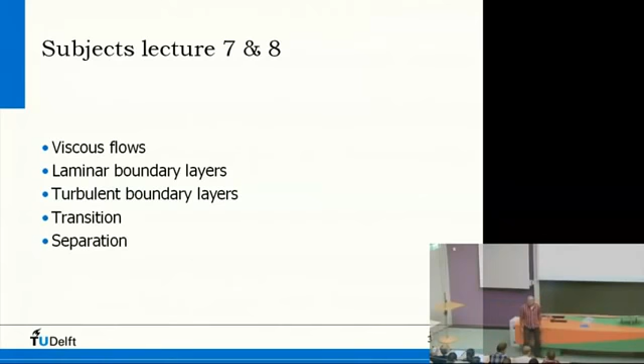So it's about viscous flows, laminar and turbulent boundary layers. You have read all about that, maybe heard all about that from Professor Bijl.

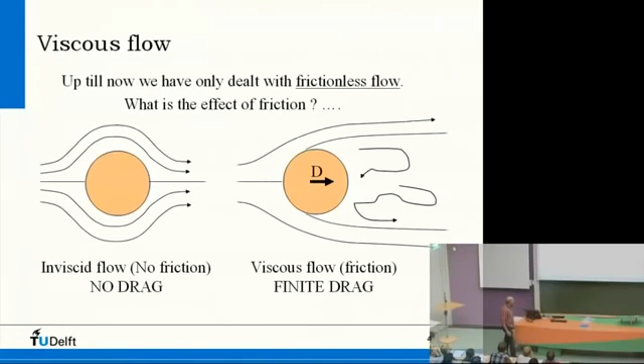So this was called the paradox of D'Alembert, because he saw that there was drag and he couldn't calculate it. Of course, in due time, people could do that, but in the time of D'Alembert, which is some 200 years ago, that was impossible.

Okay, so in real life there is friction, and you will see that there is friction, but not only friction, but also pressure drag.

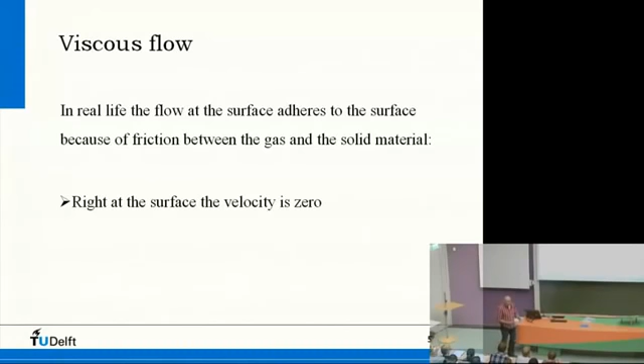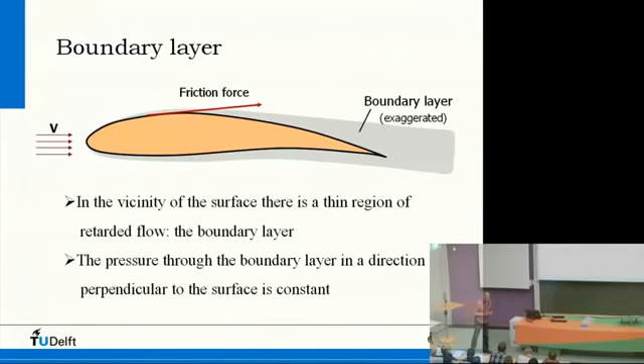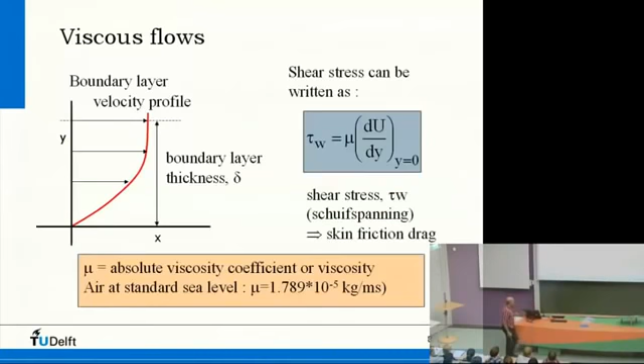Inside the boundary layer, because there is friction, we saw that if you look at how Bernoulli's law was derived, then you excluded friction. So, because in the boundary layer there is friction, you cannot calculate with Bernoulli's law, it's not valid there. Well, I will skip this because you've seen that.

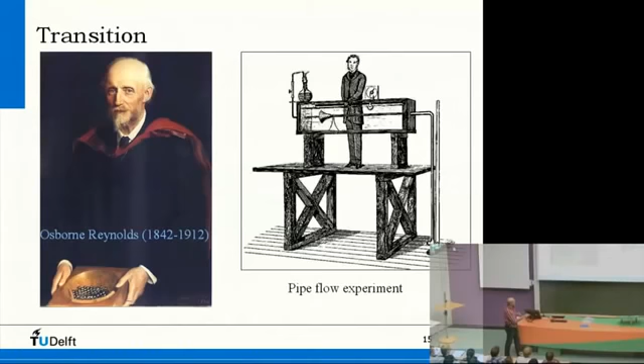Osborne Reynolds was the guy that looked very closely at the type of flow that was in a pipe. So there is his setup: there was this pipe with an inlet, and he put dye into the flow. And what he saw at very low flows, very low velocities - a combination of the velocity and the friction - was that there was this very nice layer of fluid going through the pipe.

But when he increased the velocity, and this so-called Reynolds number was increased, then he saw that at first there was this very thin layer, very nice, and then suddenly there was this what we later call turbulent flow inside the pipe. And if he further increased the velocity, then this phenomenon occurred earlier in the pipe.

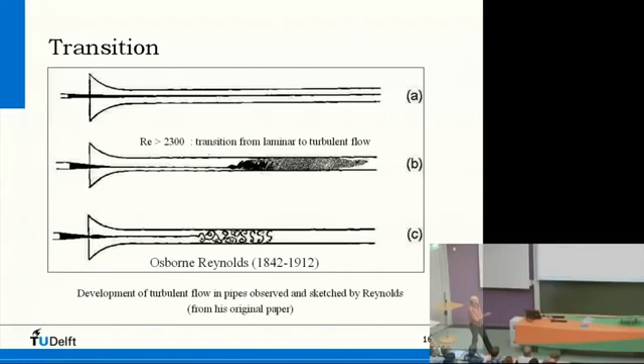And then he came up with his Reynolds number, saying that whenever the Reynolds number is constant for two configurations - two setups, for instance a wind tunnel and a free flight - then the ratio of the mechanical forces, so the mass forces and the viscous forces, are the same in both situations. So you can compare both situations.

If you want to do wind tunnel measurements and you have a certain chord, you may need to replace it with a smaller chord if you don't have a big wind tunnel. If you keep the Reynolds number constant, you can compare the flows. Everything that counts for the wind tunnel also counts for free flight.

The Reynolds number relates velocity times a characteristic length, for wings that's the chord, divided by something describing viscous flow, the kinematic viscosity nu. Honey, for instance, is very viscous, so its kinematic viscosity is very high, while gases are very non-viscous. If these ratios are kept constant, you can calculate with the same forces, which is very convenient for wind tunnel measurements.

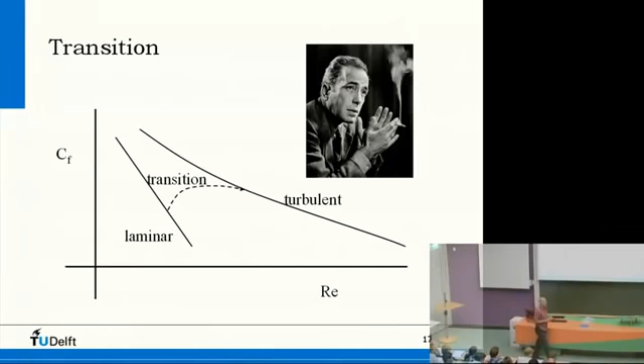If you look at the flow around a model, a flat plate or an airfoil, first you have a laminar flow, smooth layers of flow inside the boundary layer, not very turbulent. At a certain Reynolds number, this laminar boundary layer disappears and you see a turbulent boundary layer with a different shear force and friction coefficient. Somewhere in between there is a layer of transition, a transition point, though in fact it's a small area where this transition process takes place.

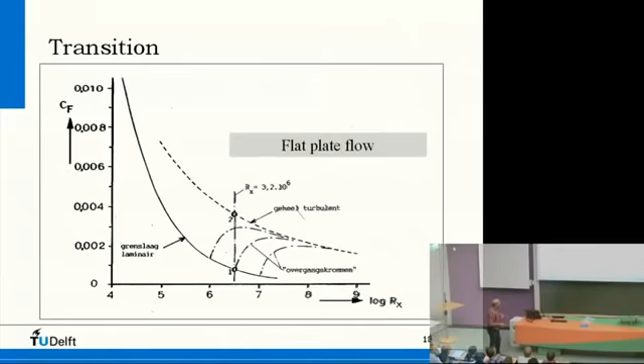What happens in this small transition region is that in the laminar boundary layer there are waves at a certain frequency that will later give you turbulence. They're already present, and as the flow comes over a flat plate you see this wavy character. Somewhere in the laminar boundary layer, this wave gets bigger and bigger, moving with a certain frequency, and when the amplitude is big enough, transition occurs.

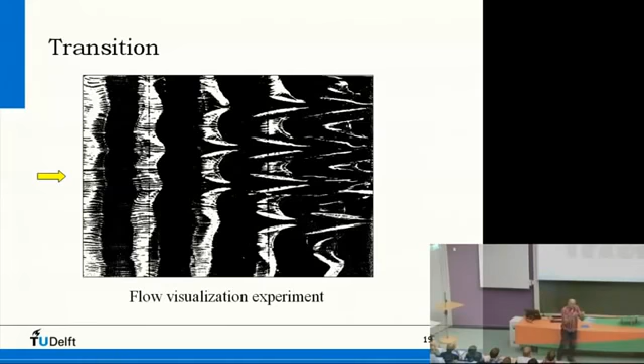Transition doesn't happen suddenly; somewhere in the flow you see turbulent spots, small vortices appearing here and there. If you put a microphone inside the flow, you would actually hear this. A laminar boundary layer sounds like a small, soft whistling sound, while a turbulent boundary layer gives a rumbling sound. Somewhere in between, these turbulent spots give you the idea that turbulence is coming on.

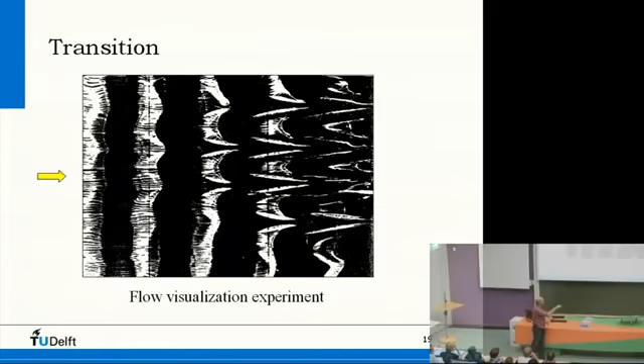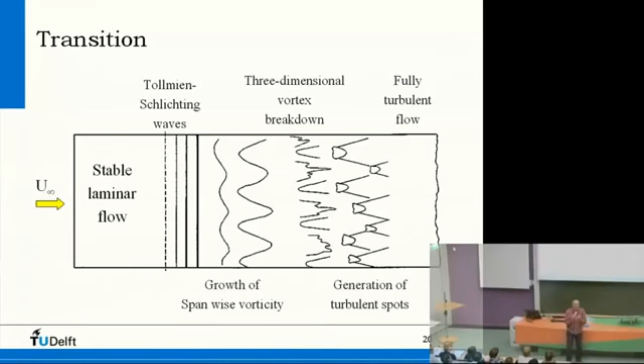This is the wavy character, these Tollmien-Schlichting waves in the laminar boundary layer, growing bigger in amplitude as the flow goes along the flat plate. Here you see the turbulent spots, and here we have fully turbulent flow - vortex breakdown, turbulent spots, and the waves. These Tollmien-Schlichting waves have a certain frequency that depends on the object; a flat plate is different from an airfoil.

If you put a speaker here with a certain frequency, you can increase this amplitude. So this transition process can be influenced by artificial means, generating a frequency matching the wave's frequency so it gets bigger, giving early transition and early turbulence. You can also influence this wave by putting dirt or grit, very small particles, on it, which can also cause earlier turbulence.

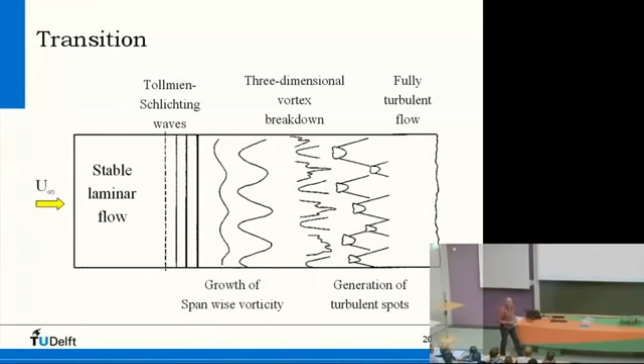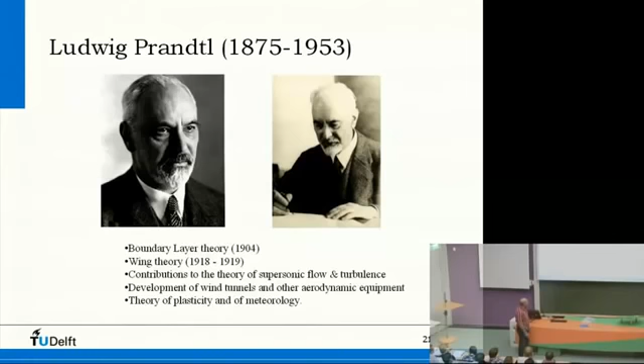Ludwig Prandtl did very fine work on this subject, also on wing theory and related topics - a very renowned scientist.

I'll skip this one. Okay.

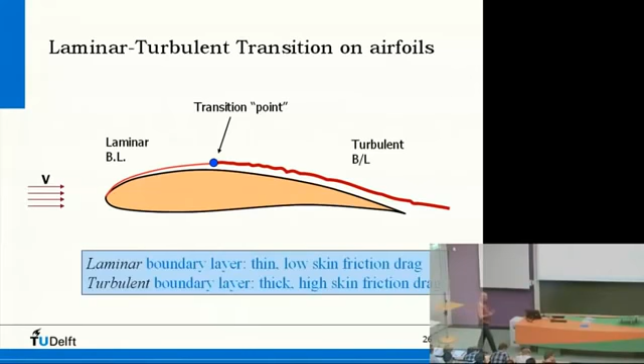Now, this is what you see if you put oil on a model. This is a model in the low-speed wind tunnel of our faculty. Flow comes from the right. The model is vertical. Here you see the chord location: 20%, 40%, 60%, 80%. This is the trailing edge, this is the leading edge.

This is oil with a fluorescent dye in it. And what you see here is the laminar boundary layer, and somewhere here you see that the laminar boundary layer stops, because here we have turbulence.

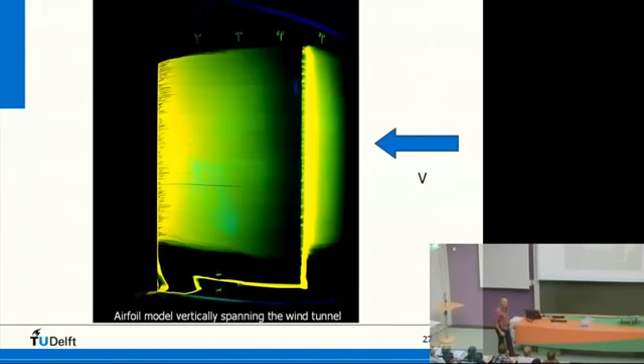The friction coefficient of a turbulent boundary layer is much bigger, so it sweeps all the flow away from where it is at that point. When it is turbulent here, all the oil is swept away and taken away to a further located exit station. So from this particular oil picture, you can see that the transition location is here.

So there's turbulence. It's a little bit difficult to see. Maybe I can lower the light a little bit.

This is another picture, a more recent one. The flow comes from this side. This is the lower surface - the other picture was the upper surface - of a wind turbine airfoil.

At a Reynolds number of 4 million, angle of -2, there's this transition location at about 40% of the chord. The same you see here, this black area. There is the turbulent boundary layer starting towards the trailing edge.

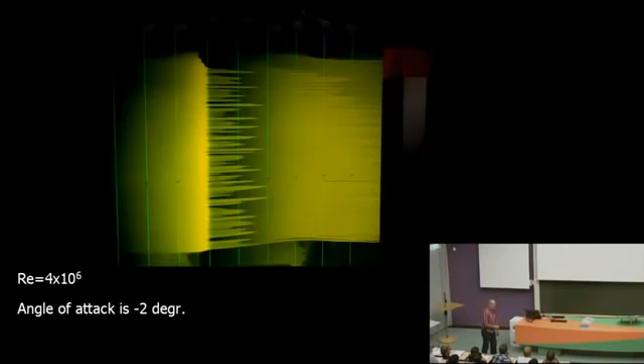So this is again 40%, but if you then go to -6 degrees, you see the oil being swept away, and the transition location is moving forward. The oil is moving in that direction, and the new transition location is this one. For -6, this is about 33% of the chord.

So on this picture you can see that whenever you change the angle of attack, the transition location moves, both on the upper surface and on the lower surface. And that depends on the form of the airfoil, on the pressure distribution.

So you can play with that, in fact, if you want to influence the drag, the total drag of the airfoil - you can do something about the transition location, because this here is the laminar boundary layer, this here is the turbulent boundary layer, and the turbulent boundary layer has a lot more drag.

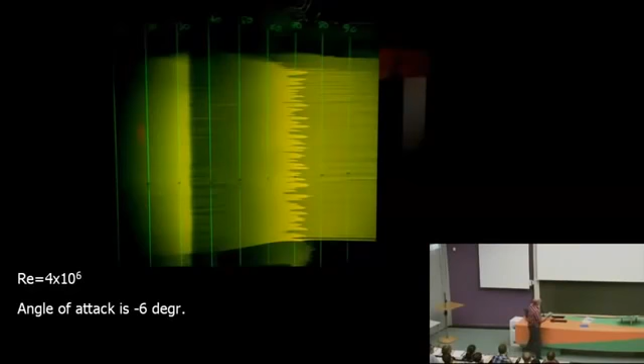In this case, because the angle of attack goes to -6 degrees, the turbulent boundary layer gets longer, so you have more drag. If this happened on the upper surface, you would also have more drag because of increasing the angle of attack. So both on the upper and lower surface, the transition location is constantly moving if you change the angle of attack.

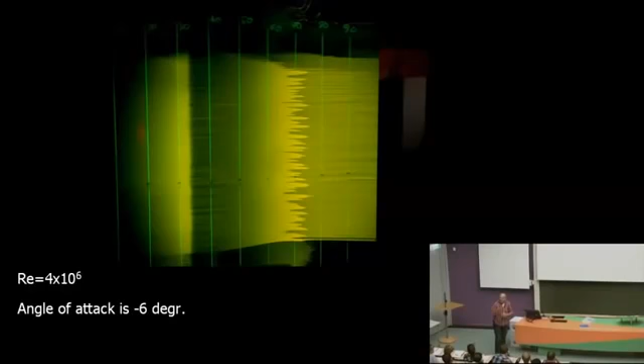And this was attached flow, so there's no separation. This is just a laminar boundary layer, turbulent boundary layer flowing along the surface of an airfoil.

If you look at the lift as a function of the angle of attack, there's a linear relation between the lift coefficient and the angle of attack. At some point, the turbulent boundary layer is very thick, and if you increase the angle of attack more, there is separation - the turbulent boundary layer cannot follow the contour of the airfoil anymore, and it separates.

It goes straight to an undisturbed situation. Because the flow is not so curved anymore - lift comes from giving a downward velocity to the airstream, which gives an upward velocity on your airfoil - because there is separation, the lift goes down.

And in this separated region, you can also make flow pictures, and then you see something like this. This is the leading edge, this is the trailing edge. This here is the laminar boundary layer, so it stops at about 10 to 15%.

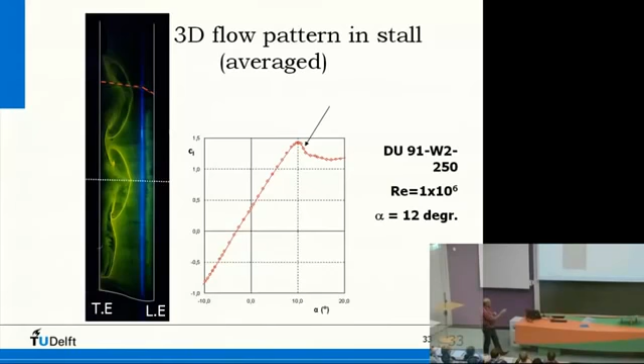And then we have a turbulent boundary layer, and the turbulent boundary layer separates, making very strange patterns we call stall cells. It's a three-dimensional pattern, although it's a two-dimensional test between walls - there's no wing or alike, just an airfoil model stretched between both walls, so it's two-dimensional in fact. But because of this separation process, you see all kinds of strange stall cells developing.

The majority of the flow is, of course, turbulent. If you look at wind turbine blades, they have a very nice surface, but they rotate through the earth's boundary layer, and there are a lot of flies and bugs that collide onto the leading edge, creating a lot of roughness. So the initial laminar boundary layer that would be there becomes turbulent because of the disturbance on the airfoil itself.

What you see on an airfoil like this, a laminar flow airfoil, is that you have a favorable pressure gradient. If you have a pressure distribution along an airfoil, at some point you have the highest velocity on the airfoil, and like Bernoulli says, high velocity means low pressure. So there's low pressure somewhere on the airfoil.

But this low pressure has to go back up to an undisturbed pressure somewhere behind the airfoil. So there is a not-so-favorable pressure gradient between the highest velocity, the lowest pressure, and the high pressure somewhere behind the airfoil. So there's an adverse pressure gradient. In fact, there is a force pushing all the molecules in the boundary layer back because of this pressure gradient.

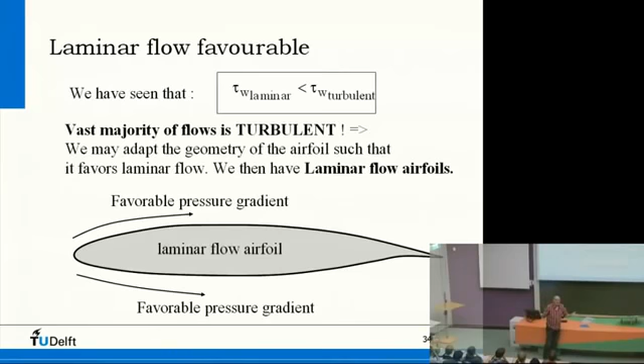And at some point, if this pressure gradient is very high, the velocity keeps going down and down in the boundary layer, and at some point the velocity is zero at the surface, and then you have separation. This is some process of separation.

So it's not only that the turbulent boundary layer can separate, but if you have a low enough Reynolds number, so very viscous flows, low velocities and very viscous air, for instance at low temperature, then you also have laminar separation, which means the flow will turn turbulent somewhere in the air, not on the model, but somewhere in the air.

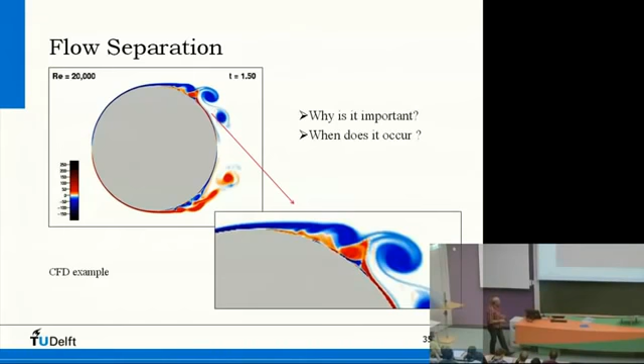Okay, separation—you've seen this. Here we see this process again. You see this boundary layer here, and you see that you lose velocity, you lose energy, and at some point the velocity is zero here. The next step is that there is a negative velocity here, so you have this vortex that gives you negative velocity, and the flow separates here from the surface.

Got a question—you know shark skin, how can shark skin prevent the water from building up vortices? How can shark skin influence the boundary layer to reduce the vortices or increase the vortices?

That is a very difficult question, since we haven't yet talked about sublayers in the boundary layer. In fact, what I describe here is one boundary layer, but in reality there is a difference between the very small layer on the surface and the one above it, within the boundary layer. We will see something about the influence of roughness on the flow, I'll show you in a moment. It's not the same, but shark skin works a little bit differently.

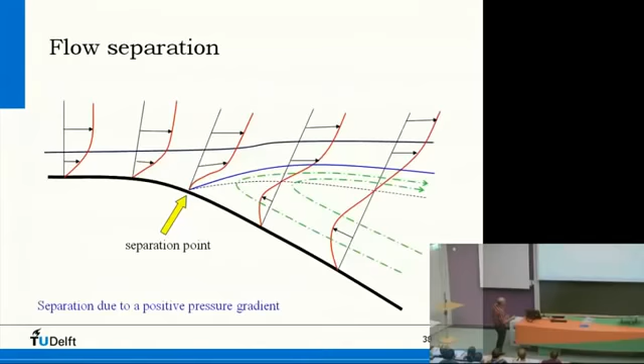A streamline will only be curved if there is a force acting on it. For instance, if it moves along an object, the streamlines are curved because the pressure gives it a curve. But if it just separates and moves straight on, there is no force acting on it, so it's a straight line. What you see here is just a straight streamline, which means you also see a constant pressure.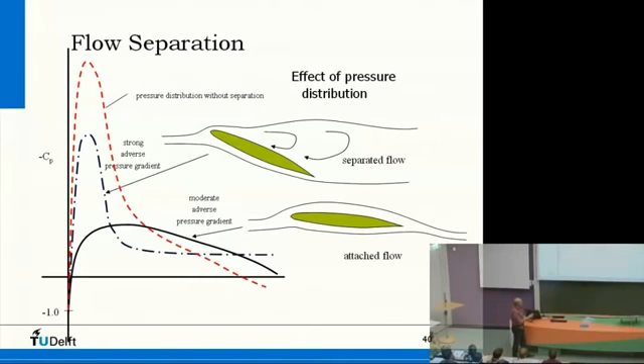So this is separated flow here, right from the 20% chord station. Separated flow.

Here we see DU91, which is a wind turbine airfoil. If you closely look at most wind turbine blades around the world, I think in 60% of all the blades, you see this airfoil somewhere halfway the blade. It's a very, very multi-used airfoil, I would say.

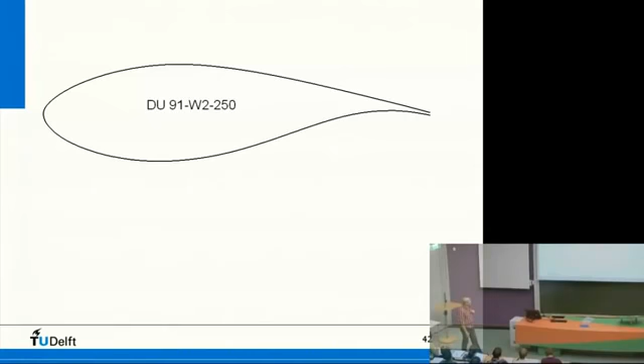DU says Delft University. With an angle of attack of 0 degrees, you will see this pressure distribution. At 2.6 degrees, it moves up. You see the CP, and this is the chord position. And this is the pressure distribution for which the maximum lift coefficient occurs.

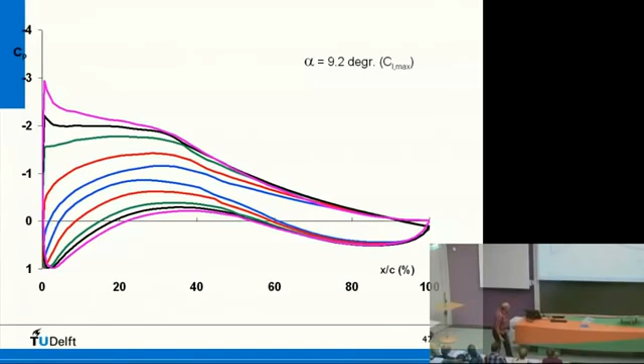If we then look at the transition location, which can be measured - I told you that the turbulent boundary layer can be detected if you put a microphone in the flow and listen to the rumbling sound. If you go from whistling to rumbling, then somewhere in between there is this transition location. And in this case we did that, and these are the transition locations.

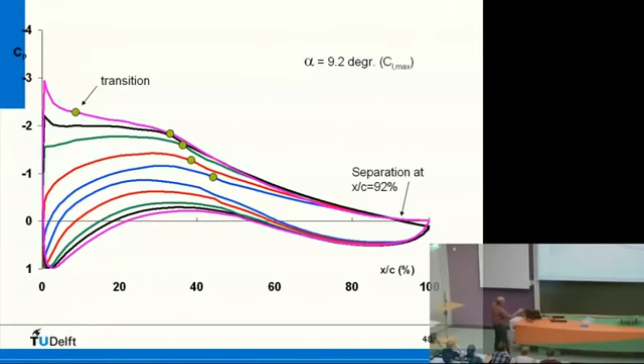You see that the moment you increase the angle of attack, the transition location moves forward. From 0 degrees to, say, 9.2 degrees, transition moves forward. At that point, at CL max, there starts some separation at the trailing edge. At 92% of the chord, there is this straight plateau, and the separation moves. If you go further in angle of attack, this moves forward further. For 18 degrees, we have separation around 35% of the chord.

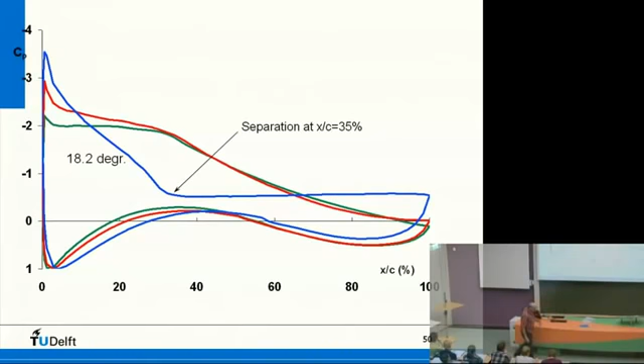There's a pressure plateau here, which means you have a lot of drag, because this separation means a lot of turbulence, a lot of velocity loss and stuff like that. So it's very high drag.

Why in general do we not like separation? Because a separated boundary layer can influence the flow around all kinds of stabilizers, other wings, for instance. If you have a vertical tailplane, for instance, and you have separation at a large angle of attack, then flaps can get inefficient because of flow separation. So in general, flow separation is unwanted.

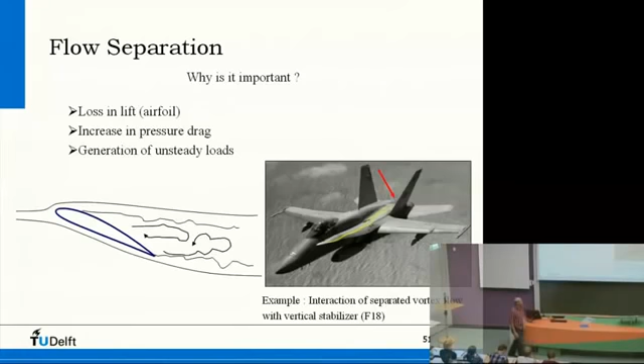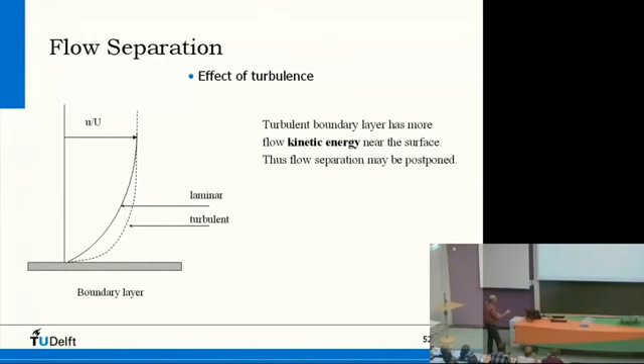If we look at the drag of an airfoil, we see friction drag and pressure drag, which together give you the profile drag.

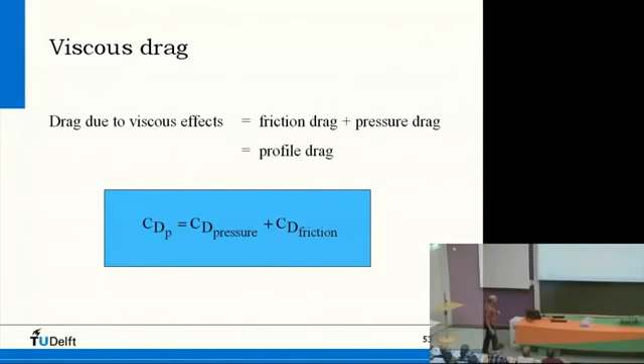Now the relation with the Reynolds number. This is in particular for this airfoil, but you see similar flows on many airfoils, so this is a good example. If you are at a Reynolds number of 300,000, which we call low, you'll see a laminar boundary layer here, and it separates from the surface, giving a big, thick area of distorted flow, with turbulence visible at the transition location off the surface.

So somewhere in the area, where the laminar boundary layer is located, you see this transition to turbulence. If you go to a higher velocity, this point will move forward, and the boundary layer will stay attached because it's turbulent. Here, the laminar boundary layer does not have enough energy to go turbulent, so it doesn't make it all the way to the trailing edge, but here it has. At this Reynolds number, 1.2 million, you see the transition location moving forward.

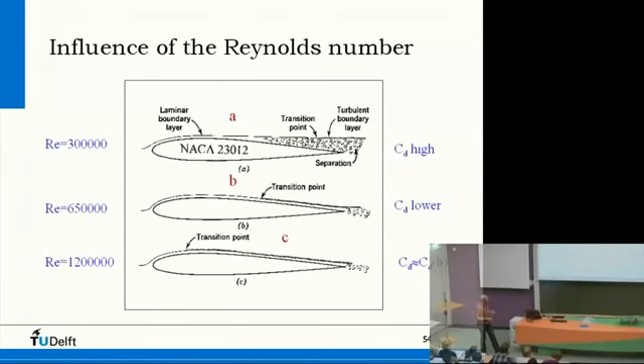But not every shape reacts the same. We've seen a flat plate, we've seen an airfoil, and this is the Reynolds number here. Reynolds number is the velocity times a characteristic length. For spheres and cylinders, that's the diameter d. For a flat plate, it's the length of the plate, and for airfoils, it's the chord. That's the characteristic length. Kinematic viscosity at standard conditions is something like 15 times 10 to the power minus 6.

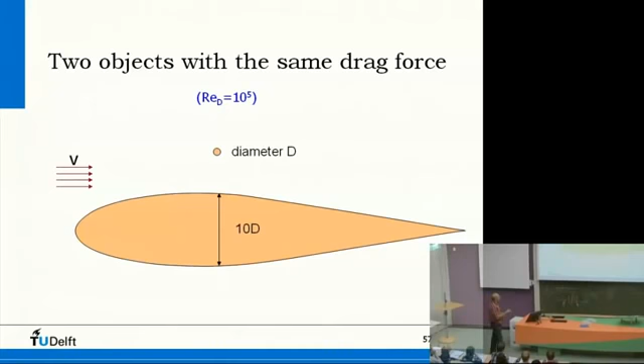And here you see the same. If you have a truck, a lorry, carrying containers, it's blunt from the back. Here you see the separation, very high pressure drag. The moment you reduce this pressure drag behind the object, the friction drag comes up, pressure drag goes down, and the result is a very streamlined object with a very low drag coefficient.

So here you see how it works. This one is of course a little bit difficult — if you round a corner, your tail sweeps like this, so it's very difficult to drive. But anyway, it has a very low drag.

Now, if we look at a sphere like this. Could this be influenced by having air inlets in the front and letting air out in the back? So an inlet supplying air to this dead air region in the back.

Yes, that is possible, although when you create an inlet, you also create a disturbance in the outer flow, which has its own drag. And if you have an inlet with a channel towards the back, that channel also has internal friction. The net result may be complicated, because with containers, for instance, you cannot move a channel inside. So the result may be a very complicated structure which gives maybe not even a drag reduction. This is a point of discussion and research for manufacturers of trucks, because they want to reduce fuel consumption. When you get down this pressure drag, you can decrease fuel consumption very rapidly.

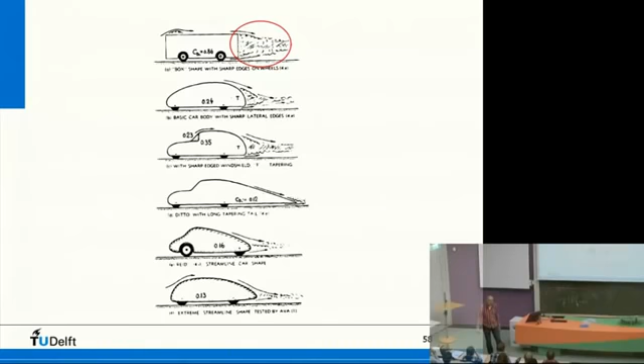And this is exactly what happens here. At this Reynolds number, the flow turns from laminar to turbulent in the natural sense. So this critical Reynolds number, when exceeded, gives a turbulent flow right in front of the thickest point, and the flow can round this thickest point and stay attached for a long time. Because of this, by artificial means you can also try to reduce the drag of a cylinder or a sphere. Since you need a turbulent boundary layer, you can try to make the laminar boundary layer turbulent.

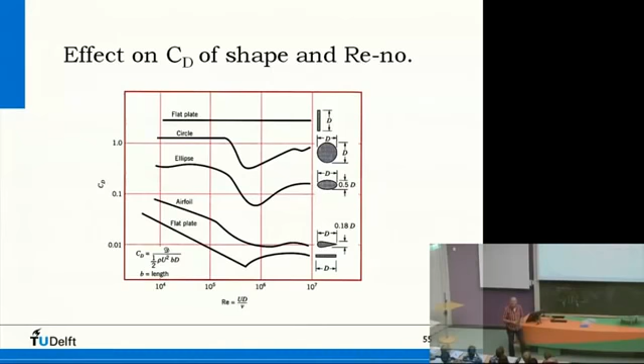And that's what happened here. You make it turbulent by putting something there, like a ring or whatever disturbance, and then it's turbulent, and this is happening.

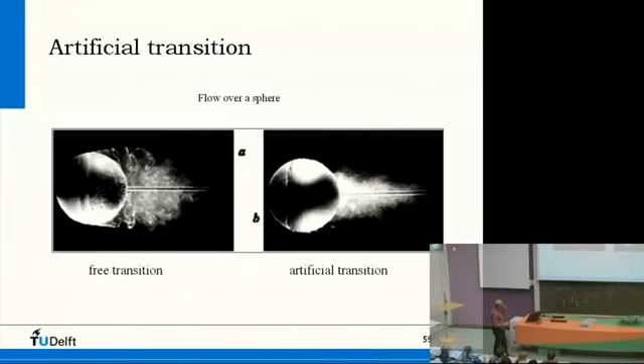No wonder you see a lot of applications of this phenomenon. In the early months of golf as a sport, they found out that used balls went much further than new ones because the new ones did not have any dimples. The used balls had scratches and stuff, so they had an earlier turbulent boundary layer, and in the first part of the flight they came much further than the smooth ones. So they found out there should be something like 328 dimples, or I don't know exactly how many, but if you have nothing to do you could count them.

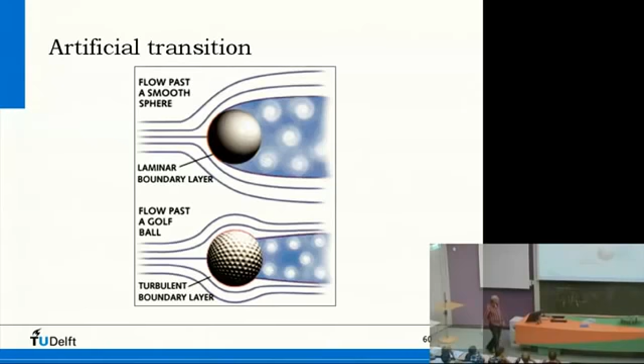The dimples are mostly circles, but they also have octagons, whenever it disturbs the flow in a good way. So a smooth sphere gives laminar flow, and a rough sphere or rough cylinder gives turbulent flow, which gives a lot less pressure drag. You see that with baseballs as well, and tennis balls — those hairy tennis balls, it's the same effect.

Now there's a nice application in sports. This was an investigation from when I was very young, maybe 7 or 8. Skating in Holland is of course a big national sport, and we like to think it's a big global sport too, but unfortunately it isn't. But whenever there are Olympics, the national union thinks of ways to get an advantage over others, and this was one of those investigations.

This guy came to us, and this was the predecessor of our present open jet facility. This is a skater, a professional skater in this case. This is a colleague of mine, Deo Veltas. This is me at a very young age, with a little bit more hair — you can't see that, but I'll tell you.

What we do here is use a stick and a tuft to localize the disturbance at the lower leg. This lower leg is in fact like a cylinder, just as the head is more or less a sphere. What you see is that this lower leg behaves also like a cylinder — it has some deviations from a true cylinder, but all in all it's the same blunt shape.

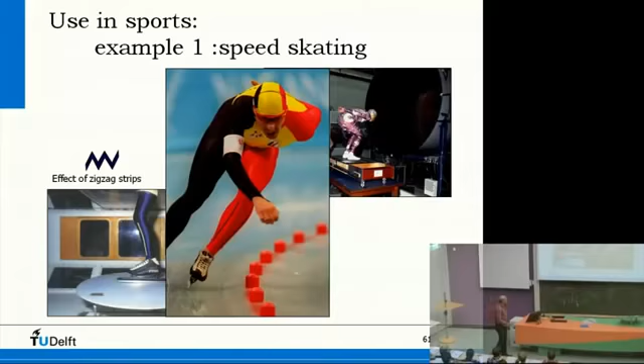And this is what happened. Here's the CD, here is the Reynolds number. If you have a smooth cylinder, in the natural sense, the drag goes down like this—just by increasing the velocity, since we have one cylinder, one situation, air, same temperature, we just increase the velocity and thereby increase the Reynolds number. It goes down here, so the critical Reynolds number is somewhere here.

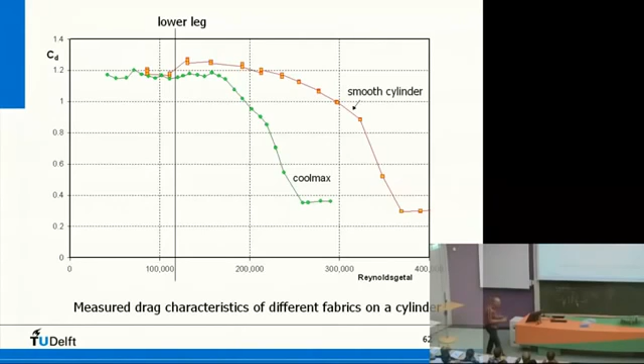But if you take this Lycra stuff, the material Coolmax, it's just a cylinder to look at, and when you take the Lycra, you go down like this. But if you look at the lower leg, the average Reynolds number of the lower leg is like this, so you have to do something to get to low drag.

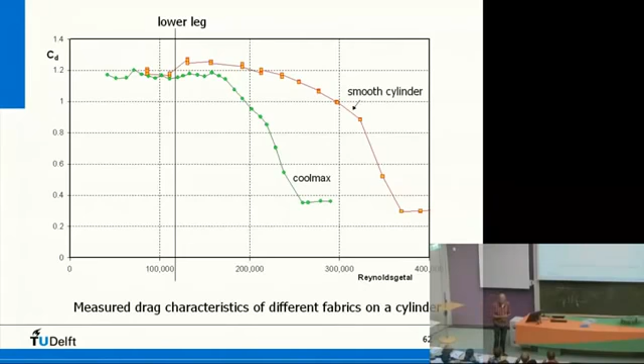You can do that by not taking a very smooth cloth, but cloth with roughness, and then you get these characteristics—rough cloth. There are various types of cloth you can use to tackle the flow. The problem is you cannot go as low as in the natural sense, so it will cost you. The moment you do it artificially, it will cost you the very low CD, so all in all you cannot come lower than this.

Yeah, there's a question?

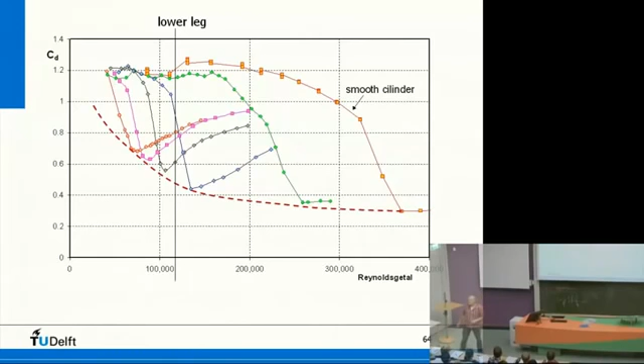Does it also work on human skin? The moment you do not have hairy legs, then it works—yeah, it does. And the nice thing is, for cycling it does too. So for cycling you should have hairy legs, but what they do, because they get massaged every now and then, is just shave the legs. And that's bad.

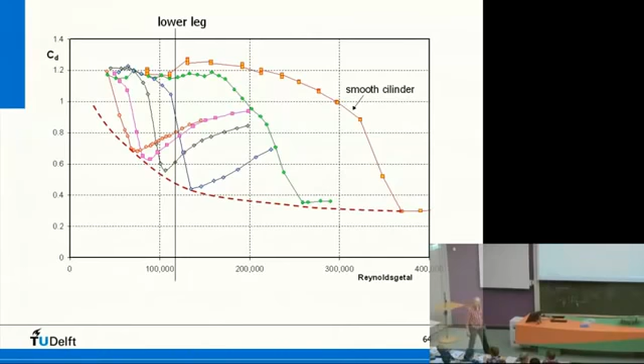You're thinking of women cycling. Yeah, yeah, okay, let's move on.

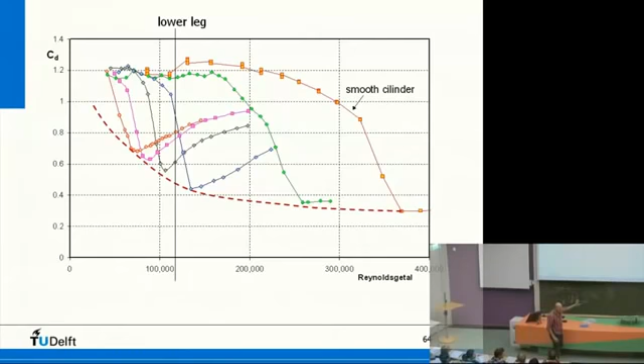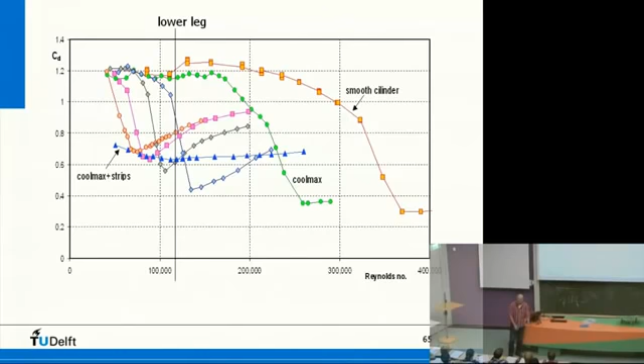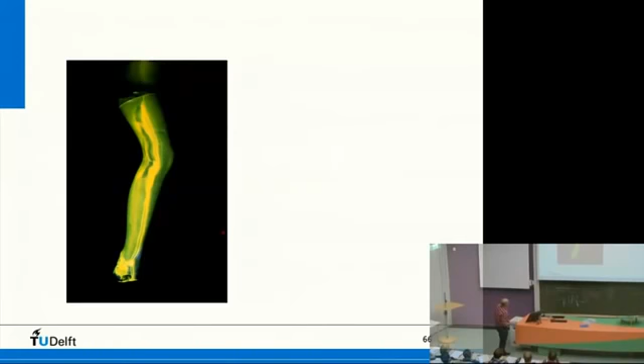Here's the separation line. And if we look at the leg with the strips, you see here it is - about 30 degrees from the front. And then you see those stripes here - these are the vortices that come from the strips. And the separation line is there.

So the difference is this: the upper leg, there is no strip, and it's the same. Why don't we do the upper leg? Because of the fact that it changes position so much - if a skater does like this, you know, the lower leg is mostly in a frontal position, and the upper leg is a little bit more difficult. So that's why we put it at the lower leg in first instance.

But this is the difference, and this difference is huge if you look at the pressure drag.

This Gianni Romme was a famous guy, and he skated 8.4 seconds off his world record at the Nagano Games - there he is, 6:22. So this is the gain he had relative to the year before. And if you do a calculation, what you can gain with these lower legs that have the strips is about 4 to 5% on the total drag of the skater.

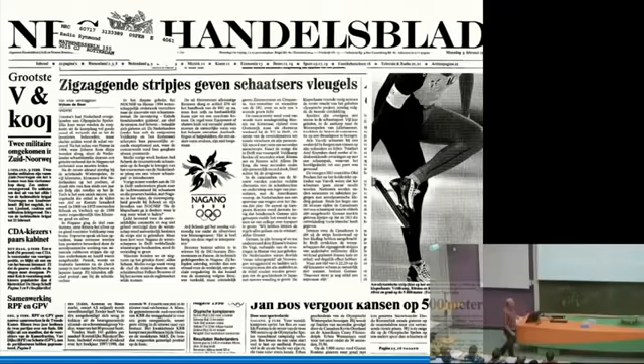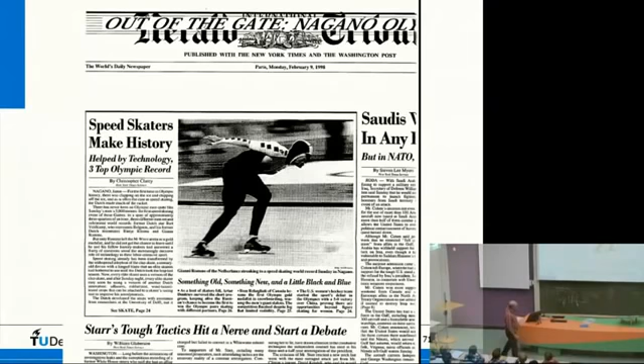So it was a big hit. This is, of course, Dutch, but 'Holland puts the skating world on top with the strips.' 'Zigzagging strips give skaters wings.' 'Romme leads stayers to a new era.' The Herald Tribune: 'Speed skaters make history. Helped by technology, 3 top Olympic record.' International Herald Tribune: 'Stripes help,' and so forth. 'Dutch feat borders on phenomenal.'

Well, it was a big success. And why was it a big success? Nobody thought of this application. It was an innovation, and it existed for many, many years before that, in fact - just like the clap skates, the fact that it's not all attached to your shoe, but it can flap. That existed for many years, and at some point people take it up and do an application, in this case in sports.

The nice thing about this application was that aerodynamics was put on the calendar again. Aerodynamics in sports gained a lot of attention, and Nike picked that up, and for the next games, in Sydney in 2000 I think, they came up with a full bodysuit for Cathy Freeman. She was a fast woman already, of course, but then they thought of this full bodysuit with a certain type of cloth. And the roughness, nobody knows, of course - they kept that secret for a long time. But this is an application of the old Prandtl discovery that you have pressure drag and that you can reduce it.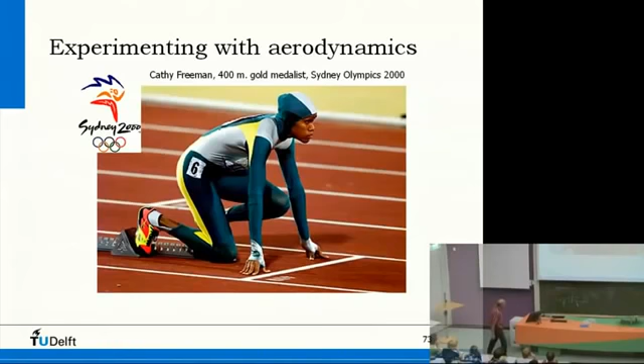If you look at skaters right now, most of them don't use any strips. Only some Dutch skaters use the strip on the head. Why is that? Because the effect of the strips is already in the roughness of the cloth of the suits—mostly Nike sells these suits—but in general they have done nothing on the head. If you do some measurements, there is still some reducing effect on the head if you do something about that, since it's a sphere, more or less, and it works.

Okay, last case study: Usain Bolt. Just to show you how you calculate the effect, whether it works or not. Usain Bolt is a good athlete, of course. He runs the 100-meter men's world record—he's the world record holder, which dates from about a year ago, in Berlin.

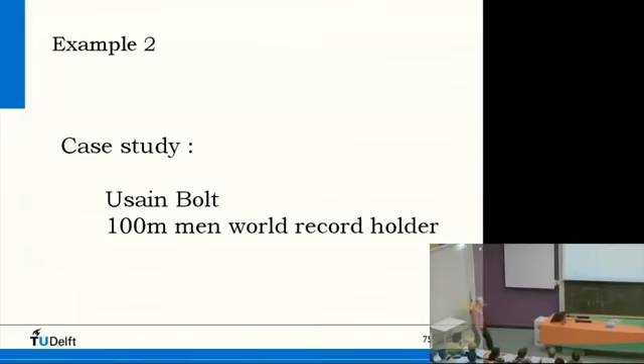If we look at the measured effect of these strips, or rough cloth, then on the lower legs it's about 3 to 11%, depending on how big or small, and so on. Strips on the caps give about 2 to 6%.

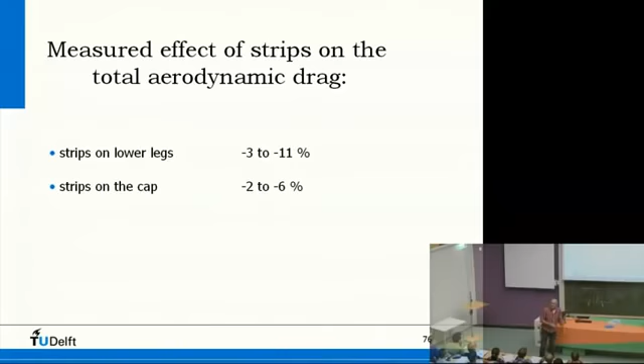Suppose we take something like 5 to 6% drag reduction on the lower legs and apply that to an athlete like Usain Bolt. Here we have him—this is the world record, 9.58 seconds. And mind you, you see his hands—he runs like this, not like that, because that gives a very low frontal area. If you run with a big frontal area, you have more drag; like this, you just cut through the air. So all these sprinters do that.

So here he is, and let's look at the power he needs to get this fast. Here we have the air density—looking at temperature and barometric pressure, it was 1.20. His length is 196 cm, his mass 86 kilos, and his total CD times S is 0.82.

If you look at the drag—I'll put it here again—the drag force is CD times half rho v squared times S. CD times S is, in general, what you are looking for. So CD times S is 0.82, and his legs are a part of that—it's 0.246 CD times S. So it's a sort of drag coefficient type.

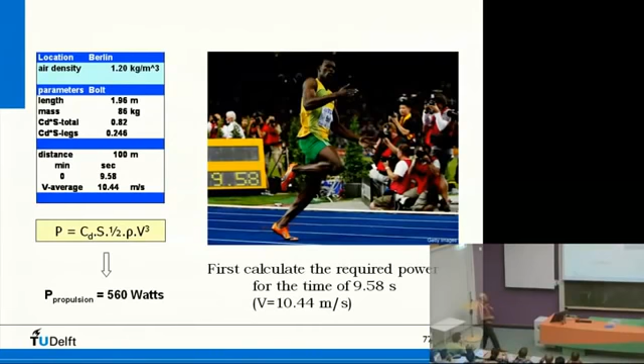The power he needs—power is work done, and work done is force times velocity. In this case, the force is the drag, so drag times velocity: CD times S times half rho v squared times v. That is the power that goes into his velocity. Of course he needs more power because he has to move his muscles and his legs, but this is what remains in his velocity. This gives a propulsion power of 560 watts.

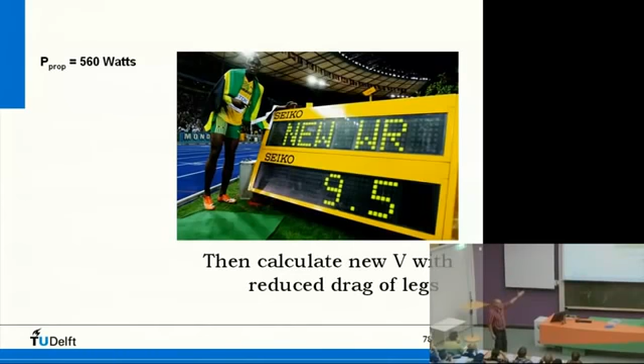If we reduce his drag by 6% on the lower legs, then we see this: this is the power he needs, the same power. The air density is the same, and everything is the same, except the CD times S of the legs, which is minus 6%.

What is the velocity he gets with this power and this CD times S? CD times S appears here—it comes out to 10.479 meters per second. So that's 9.54 seconds, which is 4/100ths of a second better than the world record, without doing anything except wearing a suit that gives his legs lower drag.

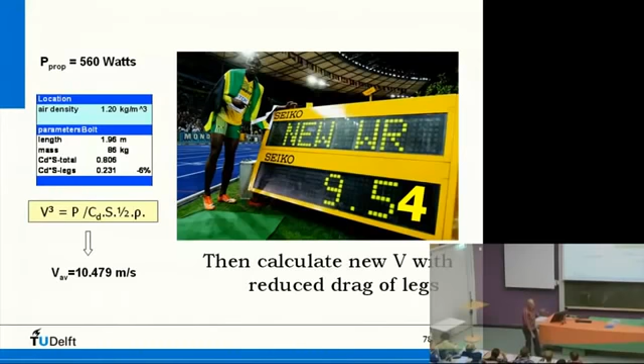I'm not sure if it's allowed or not, but this is the sort of calculation you can do. It's a tempting calculation, also for manufacturers of suits, maybe. Okay, that's it.